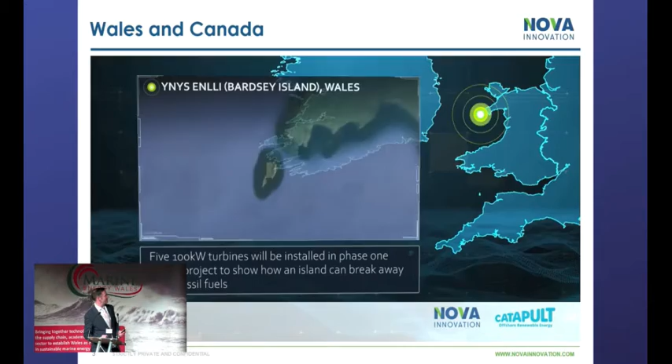Here's a bit of animation showing you our Ynys Enlli project, right at the tip of the Llyn Peninsula. We've started to gear up there. Over the past year, we've been working on bird and mammal surveys. The consenting is underway, and we are making a lot of progress in Nova Scotia.

This is showing you the Petit Passage project. Now we've got the grids in place, consenting's in place. We've actually got kit across in Nova Scotia, and we're looking for first power in summer this year. That's going to be a major milestone for Nova, a major milestone for Canada as well. We're really excited about that.

Here's what the turbine looks like, sitting quayside in Shetland before delivery. We've got 4 turbines operational in the Shetland Tidal Array - 3 have been generating power for 6 years. That again, a huge milestone. This is the 4th turbine.

This is our new direct drive. We've actually designed out the requirement for a gearbox, which makes it more efficient, more reliable, more cost effective. Again, another example of how the industry is progressing.

Great thing with this is it can be containerized and we can ship it anywhere in the world. Quick lead times, quick delivery, it's easy to deploy and easy to install. It's also scalable, so we can deploy single devices on multiples to 4 megawatt arrays.

In terms of R&D, this is the direct drive, and we're building on that. We have the EnFAIT project in Shetland, which is very much looking at the resource - how can we actually learn from that, particularly in relation to arrays. What's the optimal spacing between those turbines, the wake effects?

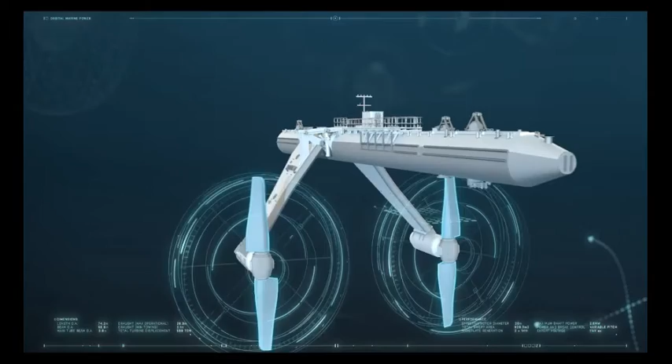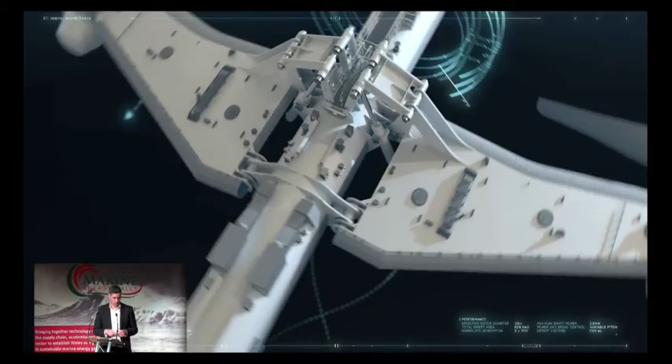But anyway, fantastic to be back amongst friends to share a bit of an update. At that last Marine Energy Wales, we'd just pulled to an end our full-scale prototype program, the SR2000, and we were raising money to build this crazy new machine at the time, which we called the O2. It was May 2019, and we'd just closed the Abundance raise of £7 million of debt into this project - which makes it quite safely the most commercially funded marine project to date.

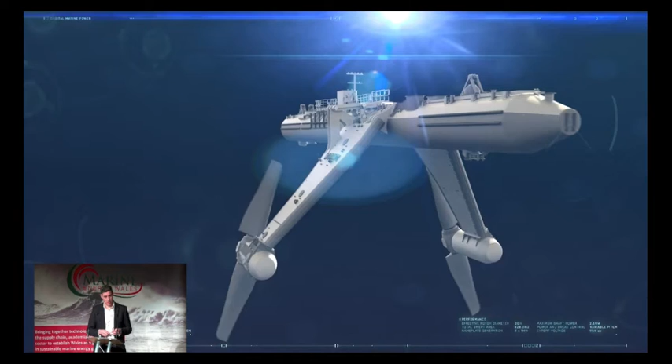Shortly thereafter we got into construction. We reached FID in the middle of 2019 and then went into construction of the O2. Nobody saw the curveball of a pandemic coming our way, but in a way we worked our way through it with the supply chain, delivered the project on budget, and it's given us two years to achieve that, come back and report.

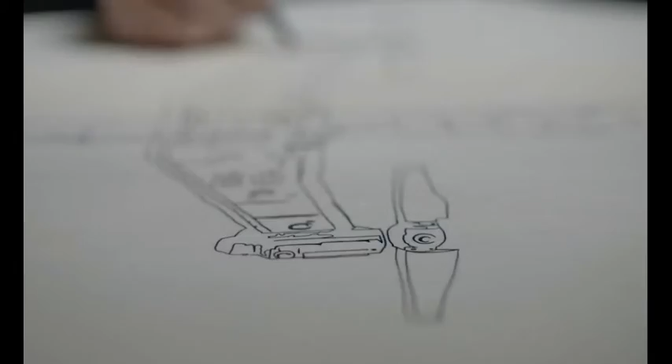This next video probably lets me do less talking, and you can see the vision we've focused on creating over the last couple of years. Really the scale of the turbine is what hits people - it pushed the boundaries of engineering and supply chain capability. This turbine is the same size as a jumbo jet: about 74 meters nose to tail, and tip to tip with the legs up it's about 55 meters, weighing 680 tons. By some margin, the most powerful tidal turbine ever built.

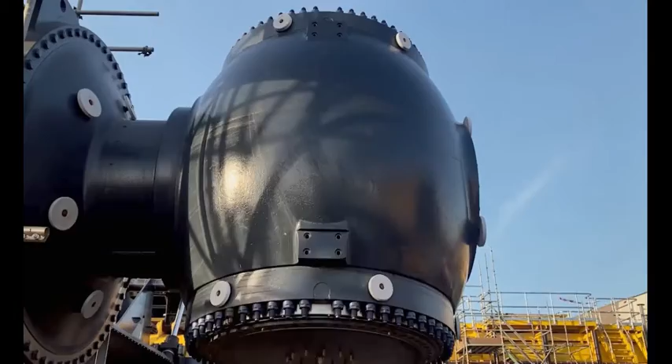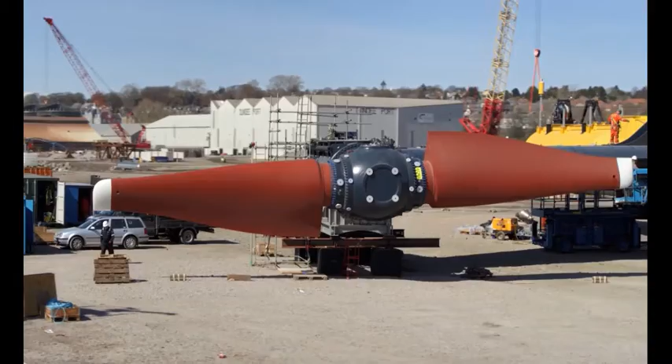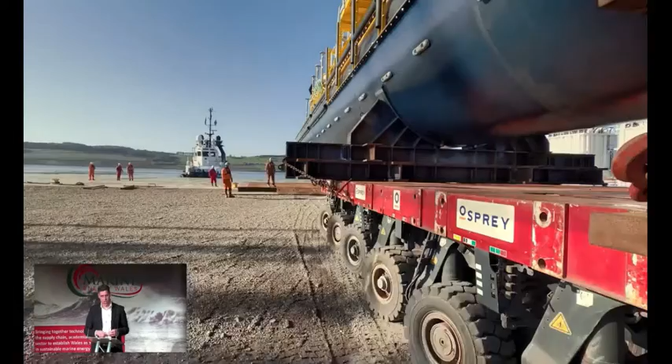At full peak it's 2 megawatts - actually it's got a little bit more than 2 megawatts capability - but at rated power it generates about 150 tons of thrust. It's held on station with anchors and chains that can lift up about 50 double-decker buses. For us, it wasn't just about creating a vision around pioneering and innovative technology - it was also an example to showcase the UK supply chain. We're wedded and committed, and we don't think it's a concession using the UK supply chain to build technology.

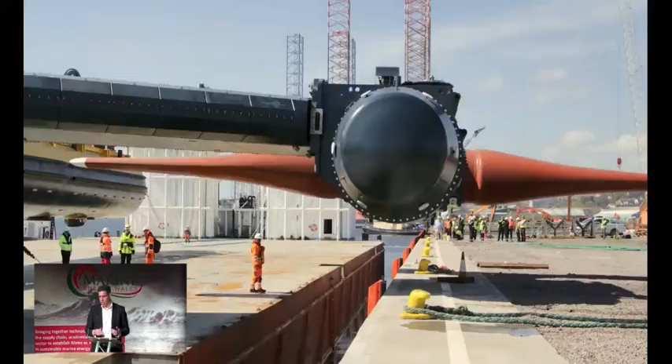Every time we do a project like this, it's a reassurance and reinvigoration of our motivation, because we find amazing supply chain people to work with around the country. We had blades manufactured on the south coast of England, anchors fabricated here in North Wales, and the full machine was assembled, with final assembly done in Dundee, where it was the first vessel launched in over 40 years.

At the peak, we had about 50 people working on site, and across the whole supply chain, UK activity generated about 70 jobs. These are totally different metrics to a renewable sector the UK has understood to this point, and I think this really demonstrates the opportunity to combine an energy policy with an industrial policy.

That can help give a just transition, not just a net zero transition. So that's kind of the vision we've created and been working hard on over the last couple of years. I've got a few slides here because sometimes the story we don't tell is why we've done it. It's an amazing piece of technology, a bold piece of innovation, but why did we end up here?

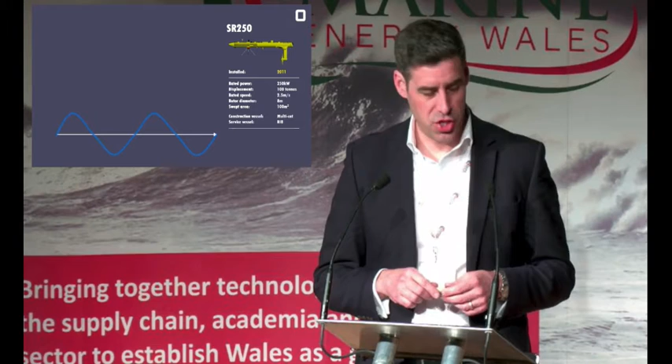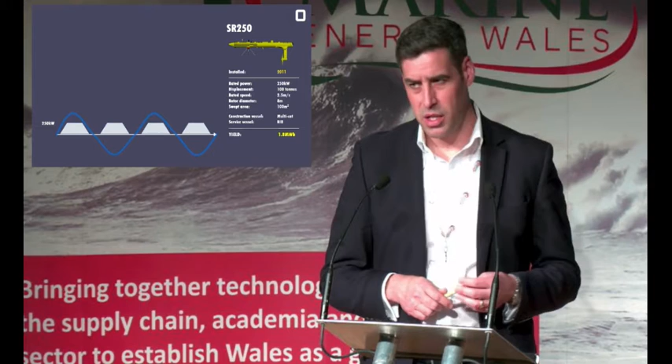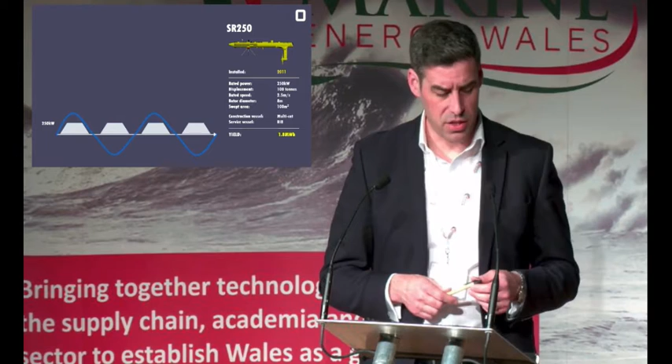On a given resource, with the performance and specification of that machine, this is what we could do with the resource on a 24-hour cycle of an average tide, where we might see 2.5 meters a second. Importantly, it was a demonstration that the concept worked at a basic level, and that the operations around constructing and installing it could also work. We did all construction activity on site with a multi-cat, and all maintenance with rib-style vessels. These are really important metrics and parameters for the economics of projects.

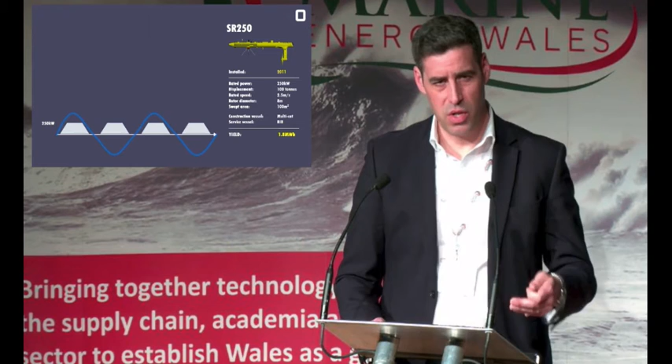It's always been at the heart of our innovation to de-risk those economics by making sure we can use low-cost vessels and things. But we knew we could do better.

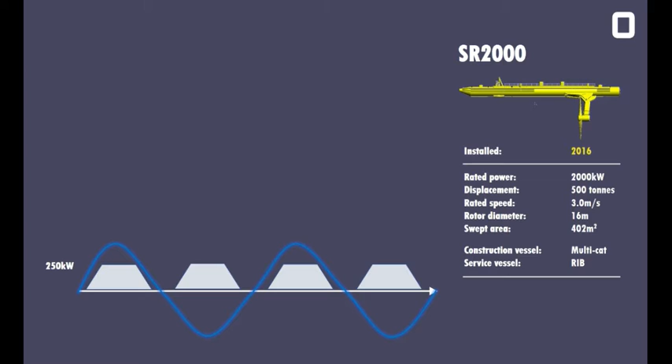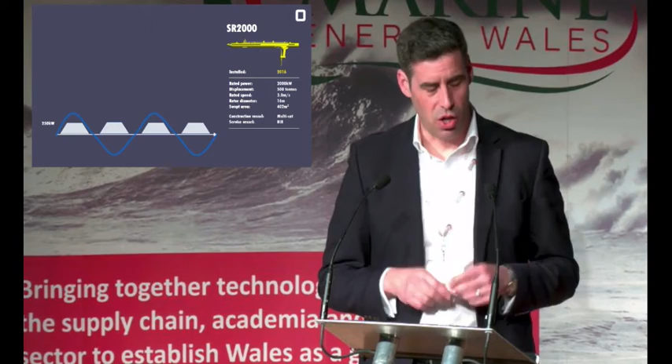As I said, the last time I spoke to this conference, we'd just finished the SR2000 program, which was our full-scale prototype machine, very much just an inflated, scaled-up version of the 250. That was built in the Harland & Wolff shipyard, and it went on to set a number of records. At one point, I think it generated more power in 12 months of operation at EMEC than all the wave and tidal energy turbines in the whole of Scotland had until that point.

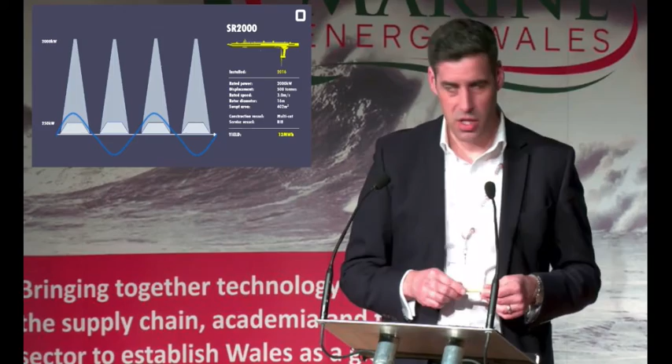And that was really because we were actually utilizing a lot more of the resource. The 250 was only really capturing the surface energy, but there's this vast column of inertia and energy below us that we were missing. So we scaled that turbine up, and it was a fixed pitch system as well.

But importantly, again, on those project metric sides, we actually used exactly the same construction and maintenance equipment. So when I usually tell people about the achievement of 12 months of generation, I actually say the most impressive thing is that we had lots of interventions on that turbine. Because we respect that not only is this an innovative new technology, which is going to generate QA and design issues as you build out, but it's a function of the technology itself as well.

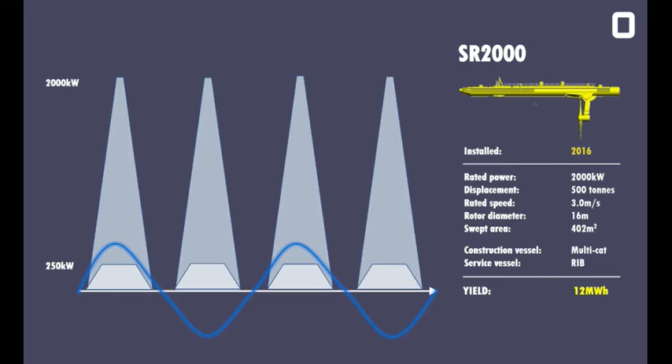You only need to look at our sister industry of wind, and you can see wind turbines need maintenance and servicing. So it was as much a de-risking of that conceptual approach, that we could maintain the machine quickly and cheaply. But we knew we could do even better than that, which was the O2. So this is very much what we're presenting now - no longer a prototype, but a pre-production commercial demonstrator.

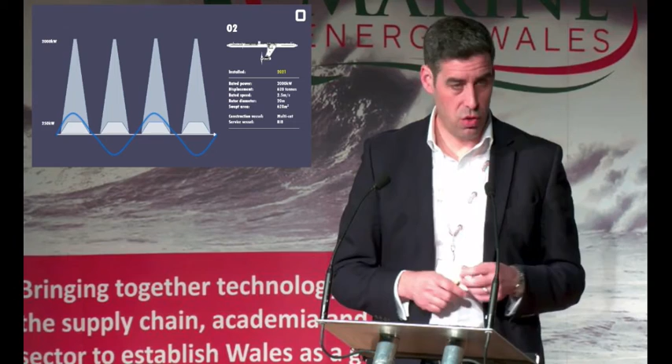There are some levels of innovation we realized we were short on with the SR2000, principally about the configuration of the legs. They come up in a gull wing type scenario, which gives us low cost, cheap access to every single major component and system on the machine. We kept the rating at 2 megawatts but upped the swept area, so this has 2 20-meter diameter rotors, sweeping an area about the size of 3¼ basketball courts. We've implemented a pitch system to get the best yield out of it, and again, importantly, demonstrating low-cost construction and maintenance.

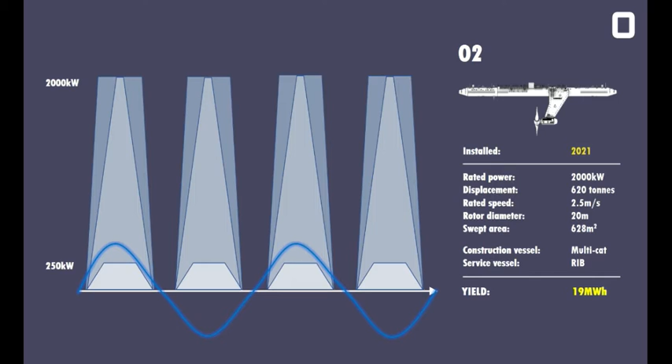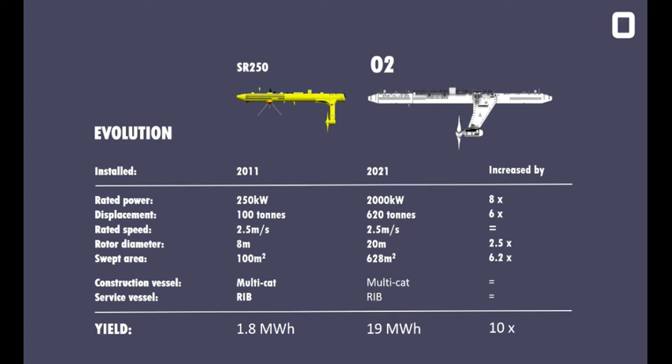And this is what it does. That's really the journey of why, over a decade, we've consistently raised private sector money to take this technology to utility scale, where we can start making meaningful contributions. That journey has taken the capacity up by 8 times and the yield on a like-for-like basis up 10 times or more. Importantly, we're using exactly the same construction and maintenance equipment, so massive economic improvement there.

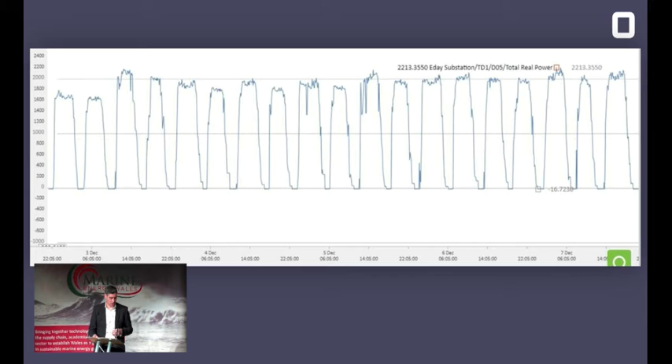And this is what it looks like in real life. This is the O2 in its commissioning process. We're not even running consistently at 2 megawatts here, but that predictable, starting to become familiar output of tidal turbines. These are just some simple stats about what the world's most powerful tidal turbine can now do: in about 3 turns of its rotors, it'll generate enough power to power a UK home for a day.

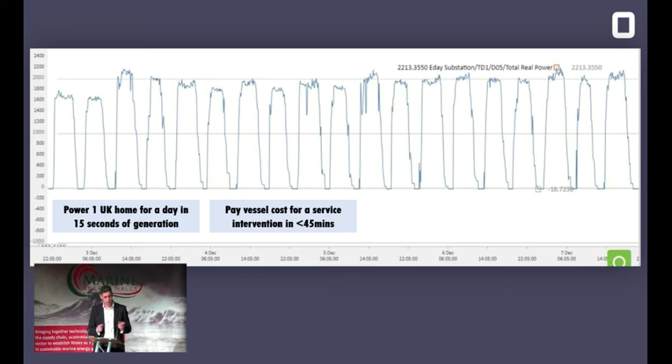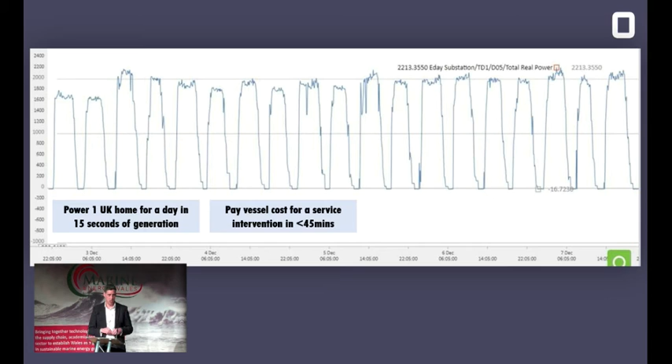This is an important metric, I kept mentioning it: the cost of a service intervention, we can pay for that with 30 to 45 minutes of power generation. So again, we're starting to de-risk. People say, well, what happens if you've got more reliability issues and need access to your nacelles 4 times a year? It actually doesn't really matter. That's the way we've approached the whole challenge - rather than trying to achieve a level of reliability about mean time between intervention, we just minimize the consequence of needing to do servicing.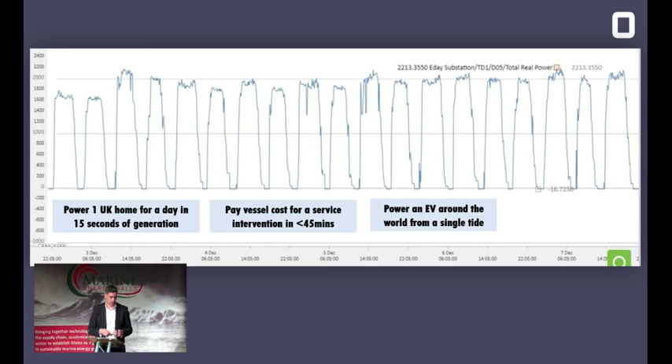Power an EV around the world. I think the phenomenon we now live in is no longer a decarbonisation of an electrical system, but that we're working in an energy system. EVs are becoming a bigger demand and a drain, and of course, again, hydrogen. So there's just some stats there.

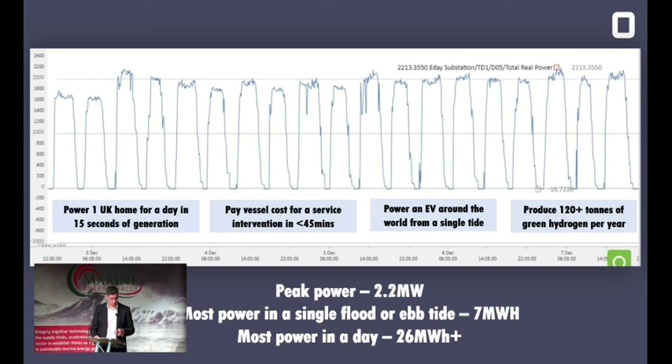We hope in the months and years to come, O2 will continue to reset the benchmark for performance of tidal turbines and the levelized cost of energy.

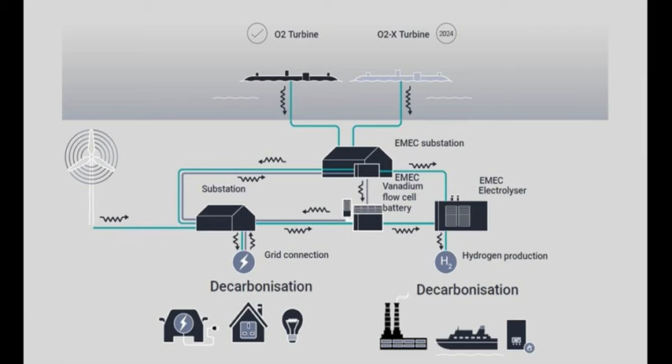This is what we're going to do next, and it feeds on from some of those analogous energy parts. Last year we were successful in being awarded a large amount of EU funding to do the next iteration - it'll actually be another O2 with some levels of innovation. We see O2 as being the right platform to go into volume, into commercial application, but we think we can get bigger rotors on it and get more power out of it.

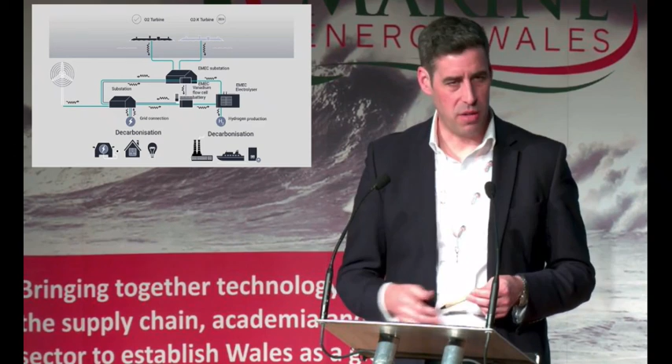It'll be connecting up at EMEC, where it's going to demonstrate a future energy system with flow cell batteries, taking advantage of that predictable resource and predictable output of turbines, and also looking to help decarbonise some of the harder to reach parts of the economy with hydrogen, where there are initiatives to power inter-island ferries with hydrogen, and even do some flights.

So it's a really exciting time for us. I'm really delighted to have been back here and be in the company of so many good friends. It's an exciting time for the industry - we're looking forward. It was great news yesterday with Morlais getting that funding. We are, of course, berth holders there, and we're looking very seriously about how we bring this technology into Welsh waters, and bring with it, hopefully, lots of opportunities for some of the great supply chain that works here.